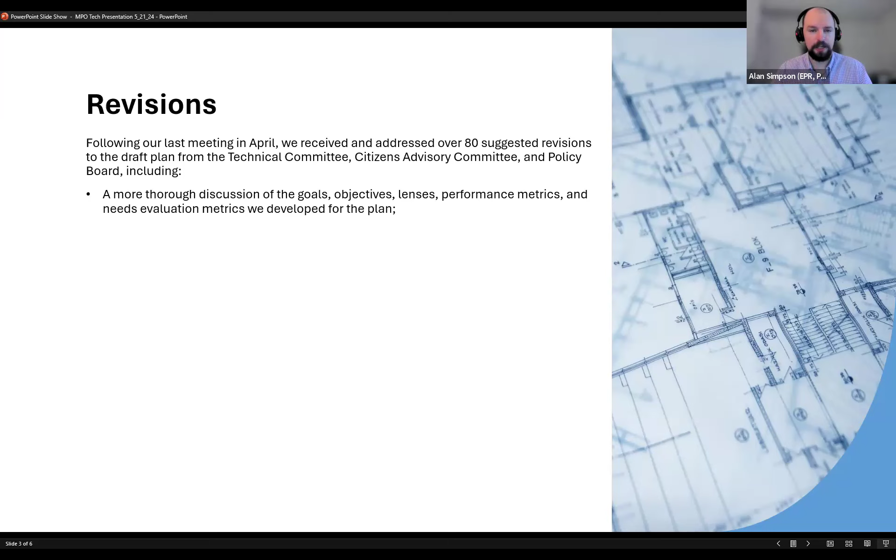Since the last meeting we had last month, we received over 80 suggested revisions from you all, the Citizens Advisory Committee, and the Policy Board. Those include a more thorough discussion of the goals, objectives, lenses, performance metrics, and needs evaluation metrics we developed for the plan. I'll also say we received these and we addressed them, so about 80 in total.

We made some minor revisions to the constrained and vision lists for improved readability and organization, and we added a few projects to the vision lists at the request of Albemarle County staff.

There was a note in the version that you have in your packets that inaccurately stated the thresholds for the high, medium, and low need scores. The process we used was a 7-point scale, but the highest score was 5.07, so we adjusted the scale. High scores were from 3 to 5.07, medium scores were from 2 to 2.9, and low scores were from 0 to 1.9. The version in your packets was going by the 7-point scale, and I had forgotten that we changed that a while ago. My apologies for that, but the updated version will have the correct language.

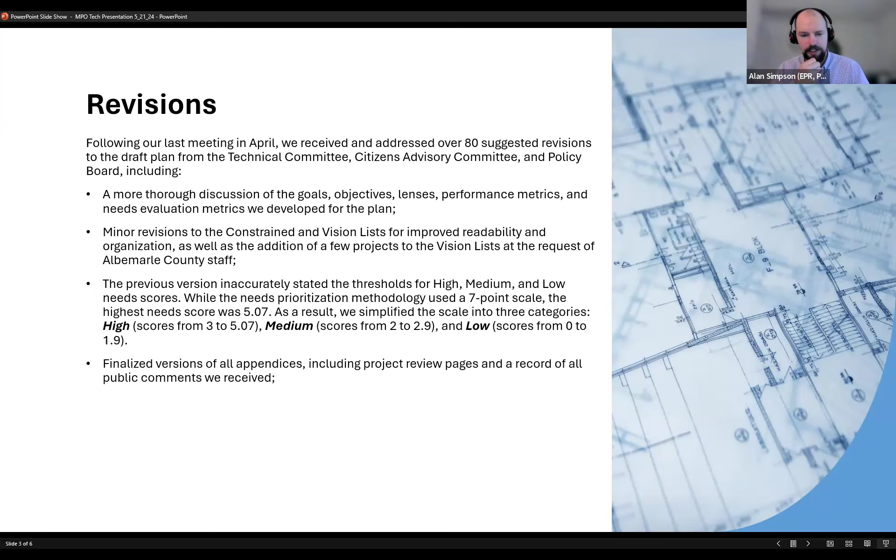We have finalized versions of all the appendices, including project review pages—a page for each project—with vicinity maps and more detail about each one. We also have a record of all public comments we received, among a few other things in those appendices.

I updated all the maps, so there are new high-res versions of every map that should be easier to read. I changed the base map and the symbology for most things, and I added additional maps of Charlottesville, zoomed in so you can see conditions in the city for pretty much every map.

There are new high-res versions of all the charts and graphs, some updates to the acknowledgement section, and just some minor grammar and style edits throughout the document.

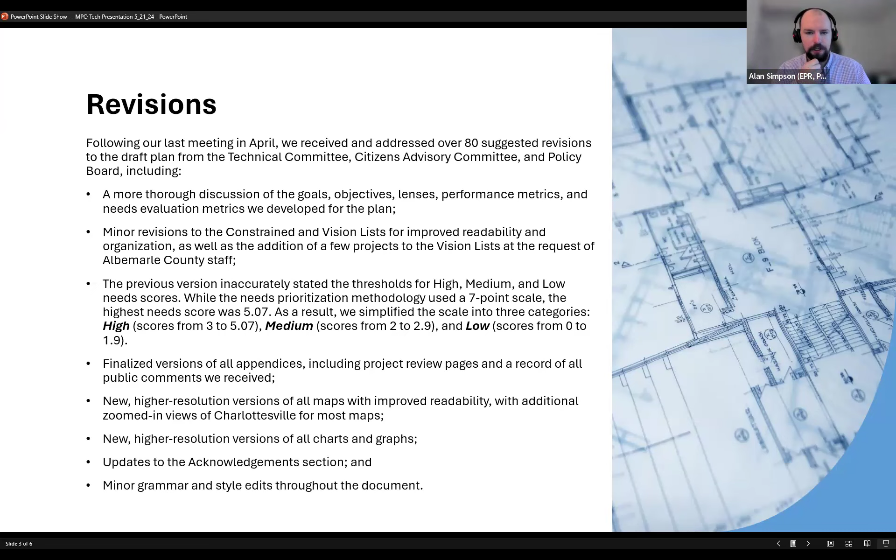So I believe we covered everything that was sent in to us. It was really helpful to see all your comments and make it a better document. So the final draft that you have in your packets incorporates all those previously mentioned revisions.

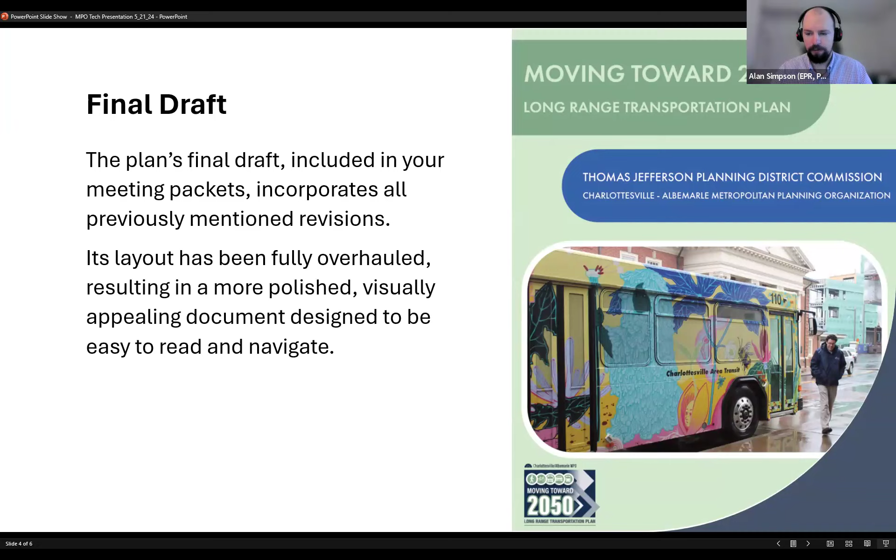It's fully overhauled. The last version was just a Word document. This one has been rehauled in InDesign, so it's more polished, a little more visually appealing, easier to read and navigate, hopefully. Next steps.

Pending your recommendation, the policy board will vote on a resolution to adopt the plan later this afternoon. As we mentioned before, the MPO may decide to revise the plan at any time. While it must be adopted this month, there will be future opportunities to tweak the document if necessary. Thank you all again for your valuable feedback, support, and guidance throughout this process. Appreciate it. If there are any questions, I can take those.

Any further comments? I have a question. We've said the public comment period is open through today, right? So what if we get more comments? We haven't gotten any comments since the last one, which was a week ago, is that right?

Correct. So what you guys would be looking to do today is make a recommendation to the policy board to adopt the 2050 long-range transportation plan with the revision on page 58, as stated, related to the scoring scale.

Other comments, questions? Last minute changes? Okay, great. Thank you all.

Motion: I'll move to recommend the adoption of the long-range transportation plan. Second. Maybe make a change on page 58? With revisions as noted. Alright, we have a second, all in favor? Aye. Aye. Any opposed? Any abstentions? All right, the LRTP is recommended for approval.

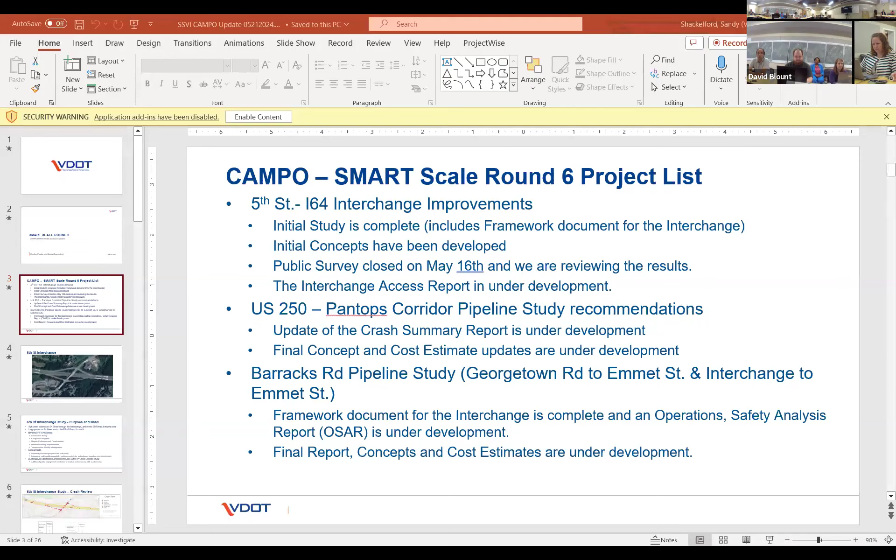So the first thing I want to do is remind you of the projects we're coordinating applications for with the MPO. These are some general updates on where we are in the process. As you recall, there was additional analysis needed for the distribution of the I-64 interchange improvement study, so we've been working on making sure all that documentation and those studies are completed. We're also preparing the US 250 Pantops Corridor pipeline study project applications, from a pipeline study completed two years ago in preparation for Round 5 of Smart Scale, and the Barracks Road study. I can also go through the Albemarle County projects, which I have in the slides.

But I'm going to spend a little time on the Fifth Street I-64 interchange improvements, because we had the public survey last week. So just to orient everybody, this is the current location of the Fifth Street interstate interchange, this is what's there now. The reason we're looking at the project in this location is that there are a high number of crashes on this street through the interchange, and also on the eastbound ramp.

Specifically, there are a handful of crashes. There are also some capacity concerns and operational concerns, both on this street and on the eastbound ramp, that we would like to resolve in this project. There are a number of needs identified through the statewide transportation plan, VTrans, including intersection safety, congestion mitigation, bicycle pedestrian transit access, and pedestrian safety improvements. Our goals are to improve operations and safety and enhance modal accessibility.

Just as a reminder, as I share the survey results, this is really an additional phase to public engagement that occurred for this project. The Fifth Street corridor study was the STARS study that was completed, I think either 2020 or 2021, fairly recently. The diverging diamond interchange was tentatively identified in that study as the preferred alternative for this location, but the study indicated there needed to be additional analysis and review of that preferred alternative. So this was intended to provide some additional information.

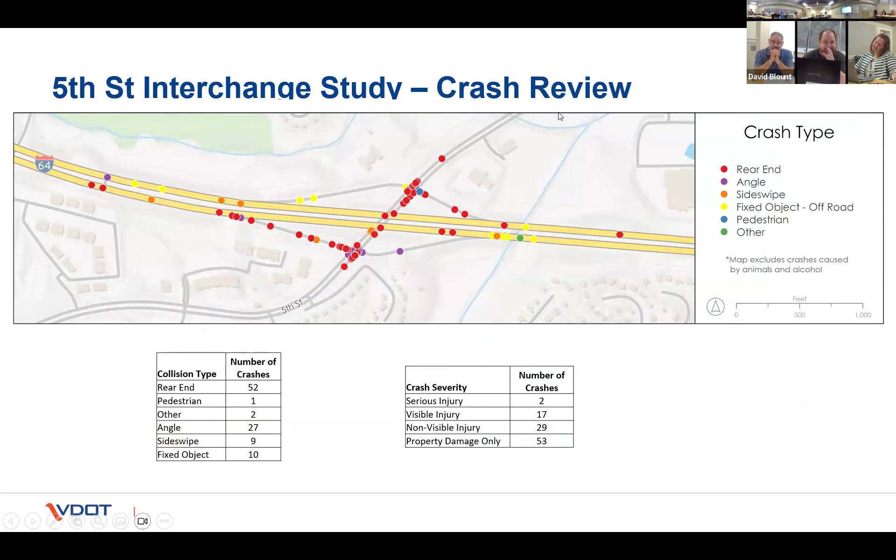Do we have an idea of what the crash modification factor is for pedestrian crashes for the DDI? It would have been all measures considered as one, so I don't have that specifically just for pedestrian crashes.

The relative cost gives an indicator of how expensive each of these would be. Smart Scale includes not just the benefits but also the cost, so you do have to consider the cost. It gives you a relative scale of which treatments are more expensive and which are less so. Any questions on this slide?

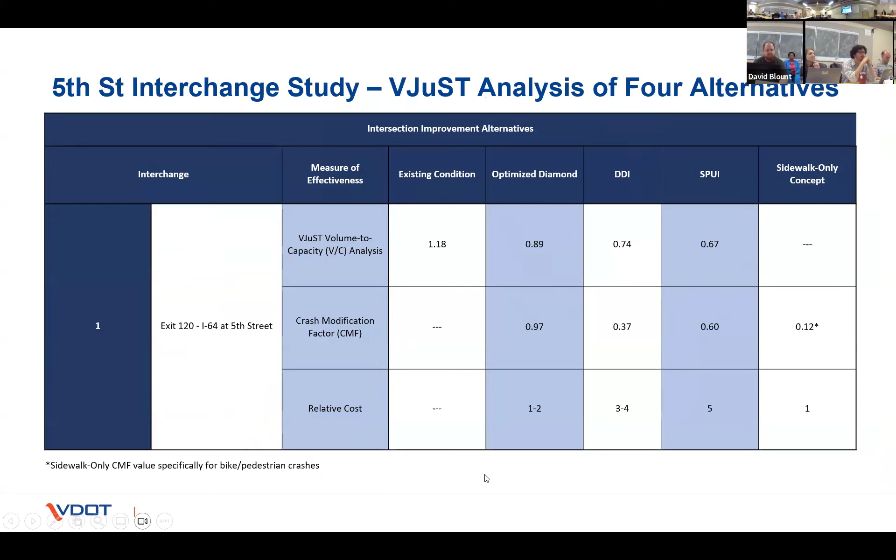For the crash pieces, the lower the number is better. You're multiplying this times the existing condition.

So there were four alternatives. We can go through these pretty briefly, and if you have questions we can go back to them. The first one was the diverging diamond scenario, which we have assumed to be the preferred alternative.

This would improve operations by reducing the number of signal phases, providing multi-mode connectivity, and improving safety.

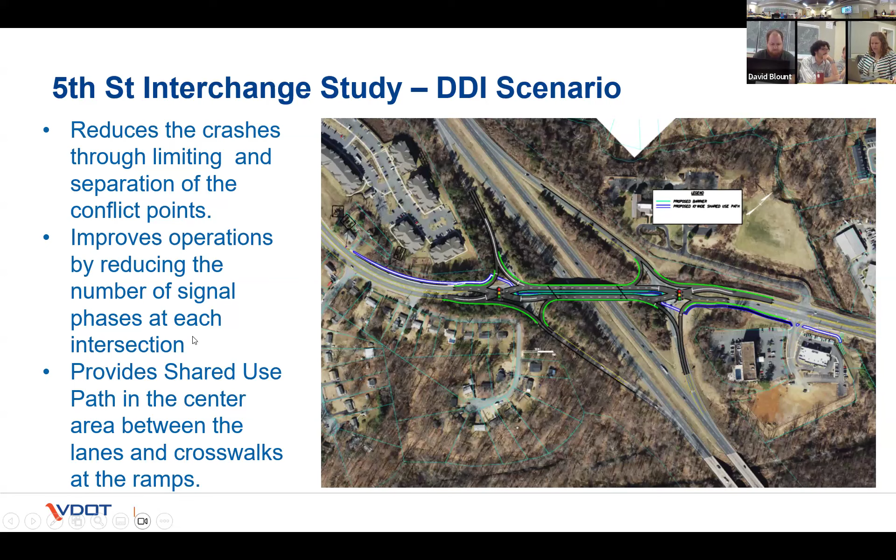The second option considered is an optimized diamond. This would look very similar to what's there right now. The difference is that along 5th Street, on both of the on-ramps onto 64, you would add a right turn slip, basically a free flow right turn onto these ramps in both directions. It would also add a second left turn lane for people coming off the exit on 64 East, with an additional left turn onto the street heading north into the city, plus a sidewalk on both sides of the road. This is the optimized diamond, and it does have some improvements to operations because it's widening the eastbound.

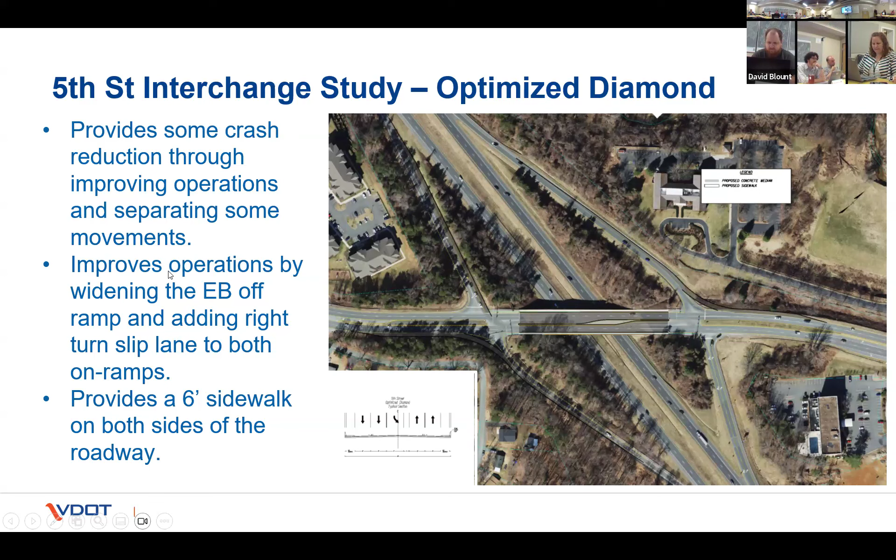The SPUI is the single point urban interchange. There would be a central point of traffic control that would monitor all movements. People turning left onto the interchange in both directions would be a single vehicle phase, so you could make those opposing left turns at the same time. Anybody making a left turn off of 5th Street onto 64 would also be a single phase. This reduces the number of light phases, which would improve operations.

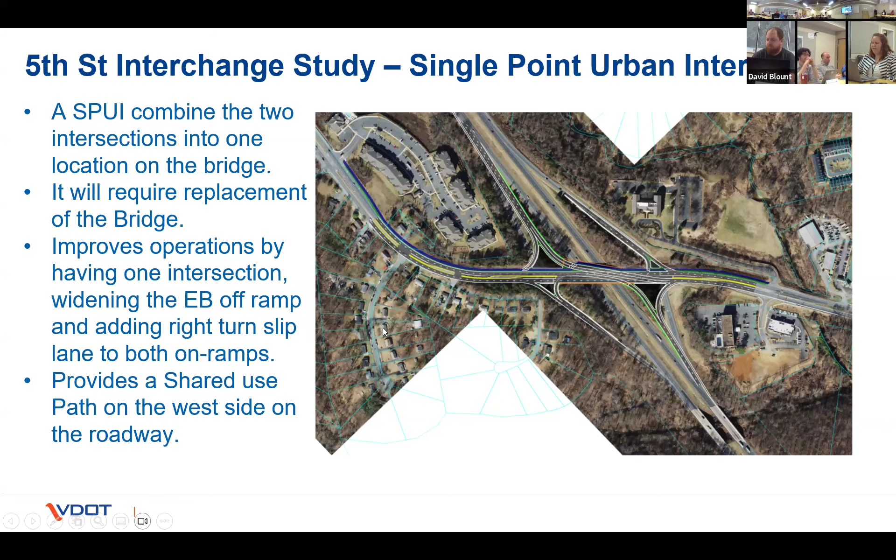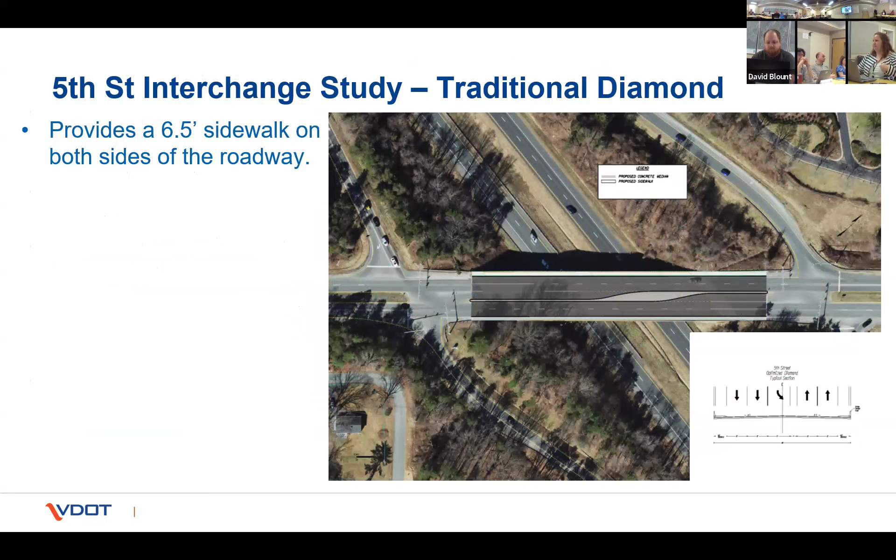It also would require replacement of the bridge because it's a very wide project and couldn't fit into the footprint of the existing bridge, so it is the most expensive option. There would also be a shared use path on the west side of the street. The final option presented in the survey is basically the existing condition plus a sidewalk, so for this discussion we can call this the do-nothing option, or the existing condition option.

Just a couple of things, because I know this is probably something you all want to understand a little bit before any action is taken on this project.

We wanted to understand a little bit of the feedback, so we did an analysis to determine how many people commented. There were 967 people who filled out the survey, but only a portion of those provided comments, so we wanted to understand the nature of those comments.

This slide shows the breakdown of feedback from people who commented on the DDI option, which had the highest average score. Out of 868 people who scored the DDI concept, 286 provided comments. Of those who commented in addition to scoring, the highest majority, 42%, scored it very low, 0 to 25, and 31% scored it very high, 76 to 100, with the others in the middle.

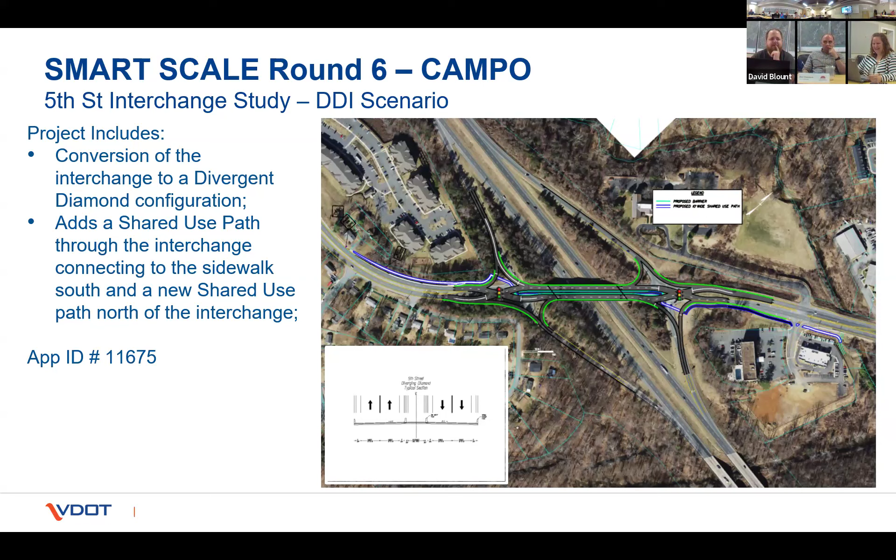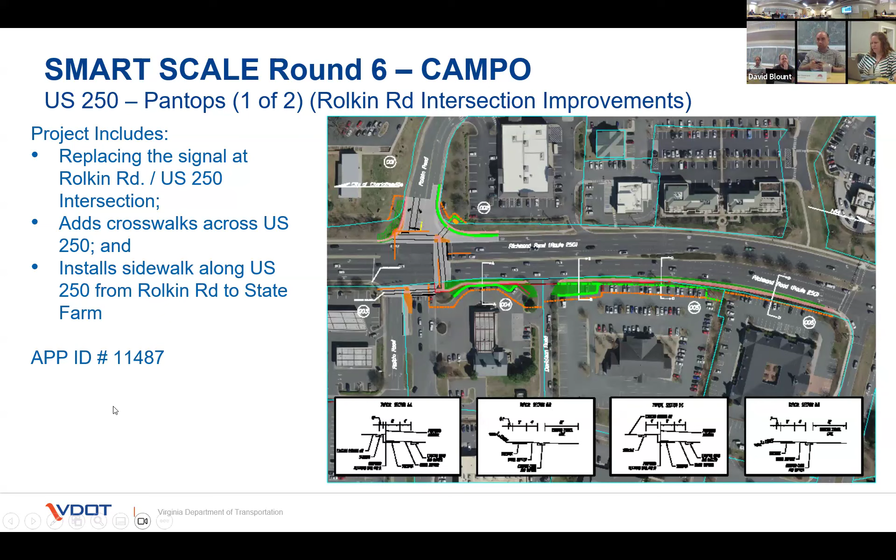Crossing Pantops will be crossing 250, and that will be a two-phased crossing. Then the other part of that application is the access management and turn lane improvements.

A little bit further down near Peter Jefferson Parkway, they're going to close the median access to the Hilton Garden Inn right there, so that would be a right in, right out. And then they'll extend the left turn lane at Peter Jefferson Parkway, and they'll be implementing a thru-cut at the Peter Jefferson Parkway intersection that will allow vehicles coming from Peter Jefferson Parkway to make a left turn or right turn, which is not approved now - they just won't be able to go straight through the intersection.